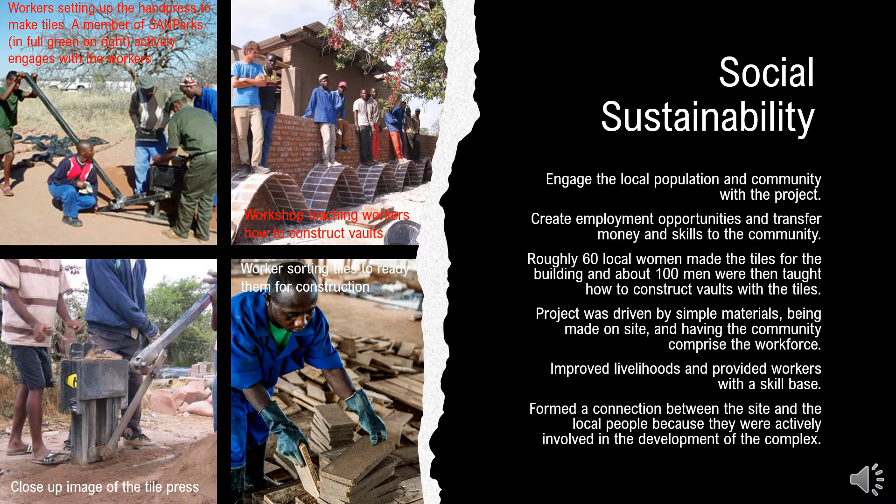The objective given in the competition brief was to provide the national park with an interpretation center that could give the visitor a very clear understanding of the importance of the Mapungubwe region and all the different African kingdoms and cultures that existed there. It was for this reason that the center was built 1 kilometer away from where the original archaeological site was discovered and excavated in the 1930s. In this way, the center celebrates the site of the ancient trading civilization.

The center was constructed with the intention of merging the natural location with the park's cultural heritage by using modern, environmentally sensitive techniques. The idea was to integrate the building with the cultural, natural, and historical landscape of the area.

The goal from the very beginning was not to reference any specific African culture or kingdom with the appearance or design of the complex. The only reference to any African kingdom was to the Mapungubwe kingdom, and this was done mostly by the choice of sites and by the housing of the artifacts rather than any architectural reference. No traditional decorative motifs were used. This was very important because of the many different ethnic groups that claimed traditional ownership of the land, and in order to avoid any controversy by any native group, reference to any local culture was avoided.

It was for this reason, among others, that Peter Rich Architects won the design competition, as their proposal referenced the landscape of hills, rocks, and valleys, rather than any African group. This complex landscape surrounding the project was both the inspiration for the design and the source of most of the materials for its construction, resulting in a composition of structures that are authentically rooted to their location. The whole design and architecture of the building was focused on its integration into the natural landscape of the site.

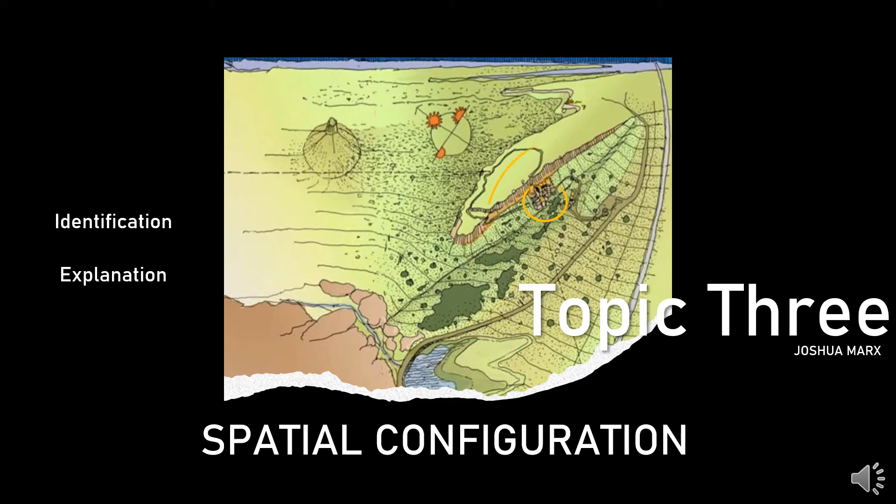Moving on to topic 3, spatial configuration, where we will be identifying and explaining the different types of connections between spaces. Set in a spectacular but remote veld landscape, Mapungubwe Center exemplifies a contemporary African architecture that gives cultural significance in how buildings interrelate and integrate with the environment. The complex rocky landscape was both the inspiration for the design and the source of materials, creating structures that are authentically rooted to their location.

The architecture gives us unusual and imaginative exhibition spaces for disseminating the intricate history of successive civilizations who have occupied this area from the 9th century until the present. But it also raises awareness of the vulnerability of the local ecology and the importance of its preservation. The building shows a naturalistic expression, one that grows from the semi-barren landscape, intense, still, and sublime, giving a connection as an apparent landmark to all lands and hilltops around it, just like the Mapungubwe mountain.

The vast tracts of veld, with rifts of beautiful native trees such as the fever tree and the remarkable baobab, alternate with the valleys, flat-topped hills, jagged horizontal ledges, and groups of rounded, stony hillocks. The synergic experience of the building connects to its land, as if rising from the terrain.

Looking closer into the building, a series of equilateral triangles structures the landscape and the way the building addresses it. The triangles are designed around an axis linking the centre's entrance and the archaeological excavations. This axis traverses the site, running parallel with the hilltop ridge and rivulet below. It is not obviously articulated, but nonetheless provides a subconscious appreciation of the ordered way in which buildings are grouped, and the informal flow of outside spaces and planned landscape elements between them.

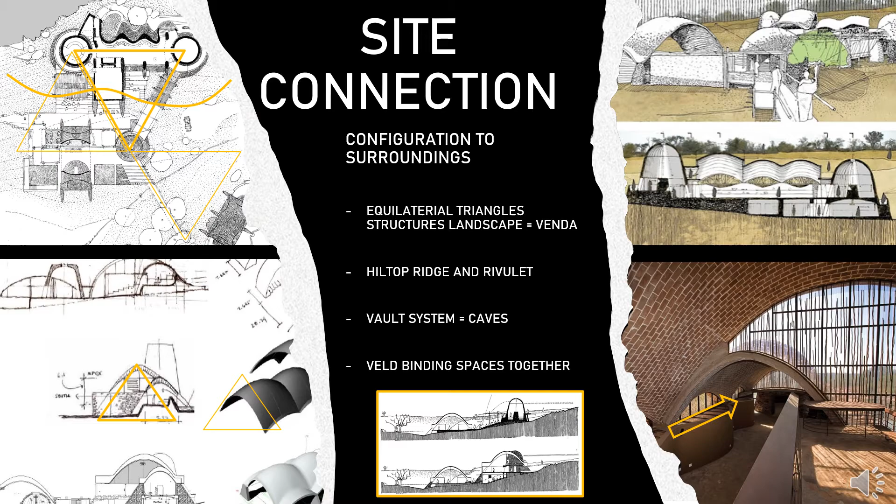These vaults resembled a system of caves, which is culturally significant. Caves were regarded here not only as places of refuge and shelter, but were also used ritually in rainmaking ceremonies. Contrasting to the internal spaces, the shaded areas and covered walkways bind together the landscape spaces between them, which are planted with indigenous species of the surrounding veld, so nature seems to flow through the structures, just like that between mountains.

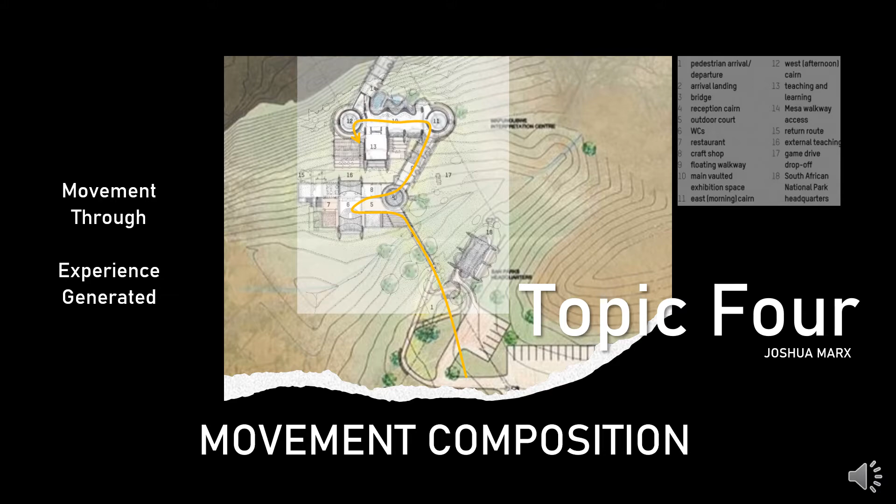And on to topic 4, movement composition, where we'll be explaining the user's movement through the building and what type of experience is generated with this. The arrival. Set at the foot of a mesa, we meet the park entrance. The building is visually contained by 3 hollow cones that evoke rock markers commonly found in South African cultures.

From a distance, the undulating rock-clad vaults blend into the landscape, where on approach, the thin arched edges are exposed and the vaults soar above the ground. The slightly sloping ground helps to make the various pavilions look even more like natural outcrops, billowing out of the earth. The sloping terrain is an integral part of the architectural design, providing a series of viewpoints along the paved routes set between dry stone walls and from the terrace seating carved out of the hillside.

Now at the entrance gate, Mapungubwe Center is approached through a valley from where the outcrop of the new buildings merges naturally into the southern slope of a rocky plateau. From here, there is a view to a hill about 1 km away, where the original archaeological site was discovered and excavated. The clever analysis of the site and the way it is structured to accommodate the program becomes more apparent as you move from the entrance in the valley to the plateau 14 meters above. From here, the whole complex is revealed and linked visually to the archaeological site on the hill beyond.

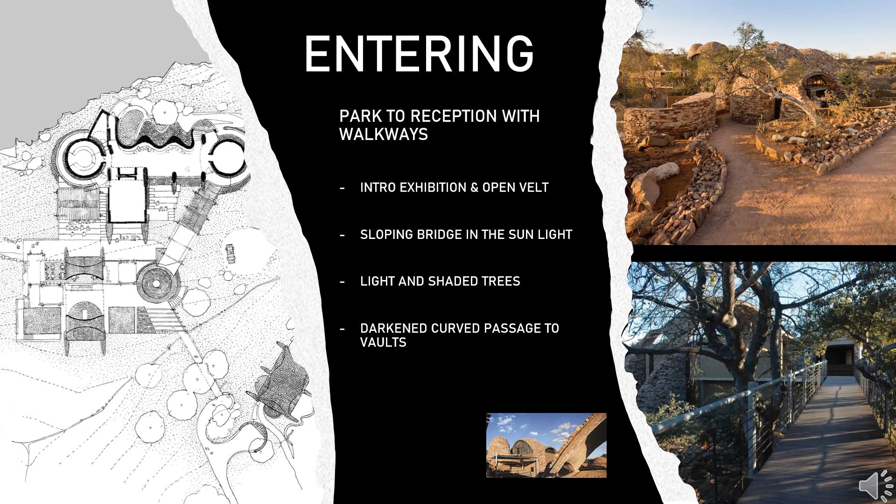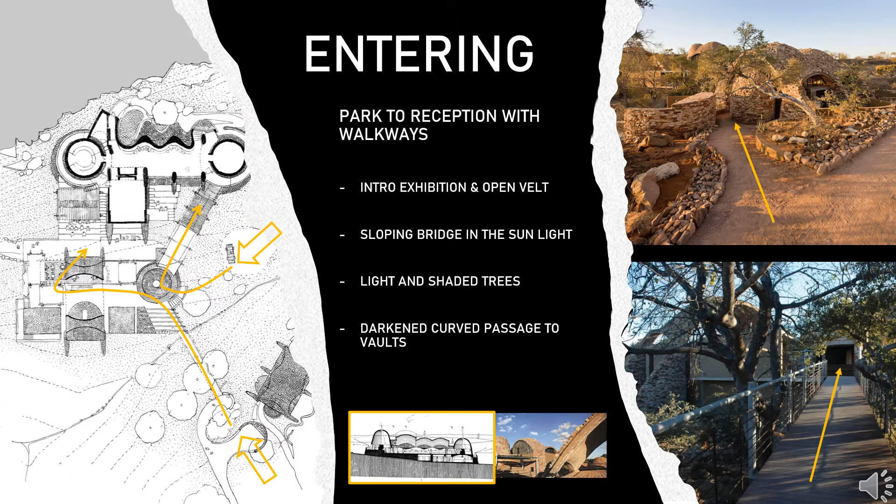Entering. Arriving at the parking area, tactfully obscured by a hillside spur, you move past an outdoor introductory exhibition to cross the open veld to a group of shade-providing trees with views of the south elevation. A sloping bridge brings you to the reception cone, which is punctured by an oculus so the sun's light bathes the interior. A freestanding vault generously spans the space between the ablutions and the restaurant facilities. Here we find the visitor's first view across a seasonal stream, the principal vault springing directly from the land on robust buttresses, setting the volume and tone for the site.

The volumes near the reception are linked by terrace seating, contrasting structured horizontality of the contours with the sheer domes and arches. The surfacing of all the masonry and local rubble stone creates a timeless quality, with nature rising once again to a singular large rockfall. From the reception area, a darkened passage curves around the cairn to an inclined, elevated walkway with a slatted timber floor and mesh-screen balustrade, leading us to the entrance of the historical facility.

The stone walling technique used in the building of the centre was adopted from the native method prevalent in the Mapungubwe area. The light and shade inside gives itself to the shapes and patterns of the world around the building in an African environment, in the closed under shade of fever and remarkable baobab trees, with the alternating open veld valleys, stony ledges, and rounded stone hills. Mapungubwe is a fascinating landscape.

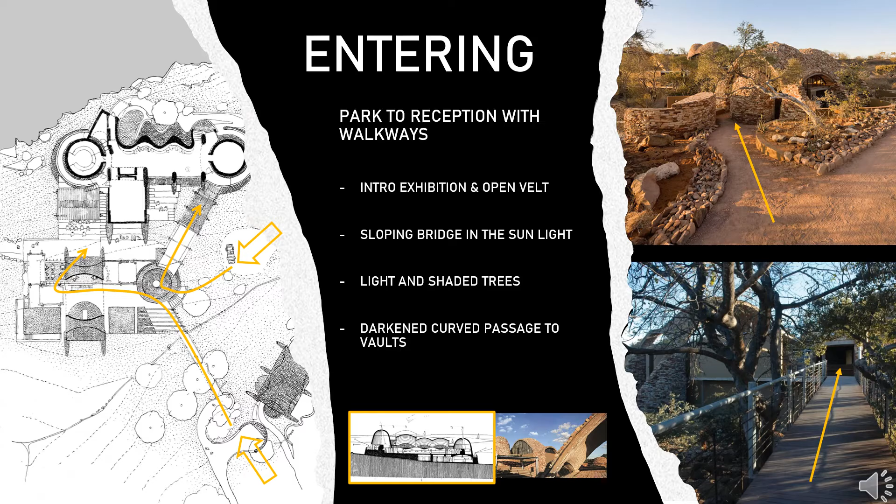Shaded by tall trees on either side, you reach a heavy, stone-clad, sloping buttress marking the threshold to the crypt-like exhibition areas. In these spaces, vaulted tiled soffits exhibit the faces of people who have been part of the historic continuum of Mapungubwe. The main vaults. Passing through a sequence of different spaces, vaguely aware of the triangular ordering system, as you ascend through the building, you finally arrive at the generous vaulted exhibition area at the building's summit.

Shaped by natural structural forces, large vaulted spans can be achieved with minimal roof thickness, achieved through local materials and simplicity of construction, allowing unskilled labor, which was a common trait. Timbrel vaults are ancient structures originating in the Mediterranean region 700 years ago and are still in use today by the Catalans. Large areas cut out of the vault admit a soft, almost sacred half-light to the exhibition area. The experience of the internal exhibition space is cavernous, articulated by the exposed tiles made from the local soil.

The external terraces are shaded by horizontal slats to create areas reminiscent of the traditional African gathering space, or kgotla. Curving in two directions, the lofty, undulating vault bears lightly on the side walls. Colored light falls through the glass panels on the south wall, and the famous golden rhino, one of Mapungubwe's most precious treasures, shines in its own impressive display cabinet.

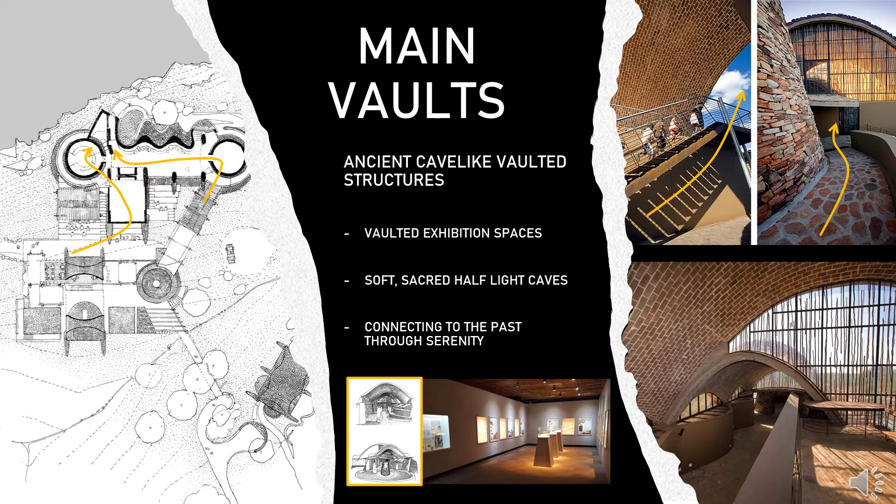The final movements. As visitors move from the main vaults, they have a choice of ramp and stair, internal and external, to move into the upper parts of the vaults and appreciate the privileged view of the lower volume, as did the ancestors from the elevated position on the plateau of the hill. The route continues outside the covered spaces, leading to the highest part of the site and affording a view across a flat expanse to Mapungubwe Hill in the distance, with its backdrop of Limpopo.

As you experience a sequence of delicate walkways with changing directions and ramped routes throughout the entirety of the building, the orientation and variety of structures from lightly covered walkways to vaulted spaces, all punctuated by open courtyards, landscaped with rocks, plants, and pools, you can only marvel at the ingenious organization of a complex and historically potent site.

All this comes underpinned by a strong social dimension, ending with a gradual climb to the mesa, to the highest point of the site, providing the visitor with a multiplicity of experience and views, evoking the complex social interactions of the many cultures that have traversed the land.

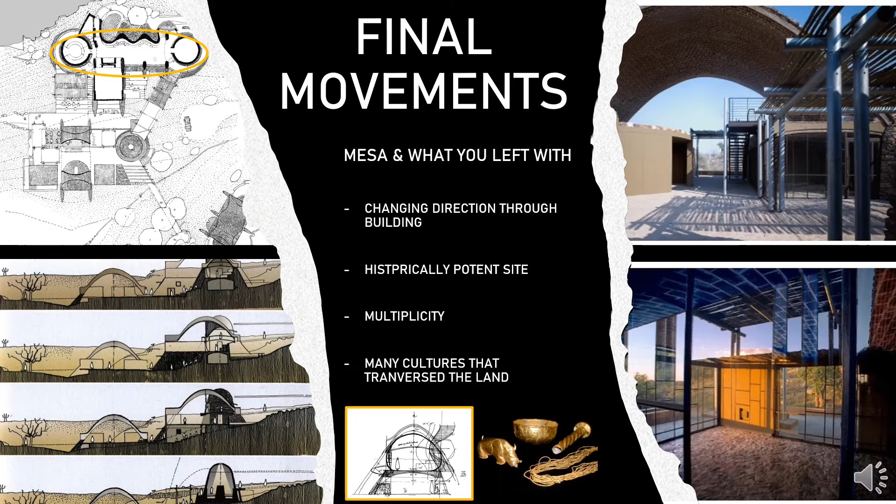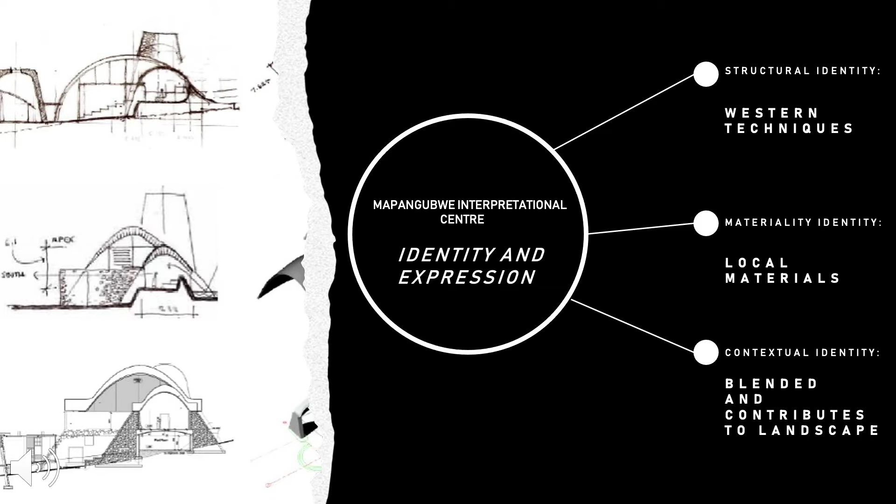Identity can be described as many things, as each person's view on identity will differ. Architectural identity is somewhat similar; however, we can gather a shared understanding of this identity through different aspects of each specific building. In analyzing this building, I found it easier to explain identity through the three most crucial aspects of this building, these being structural identity, material identity, and contextual identity.

Starting off with structural identity. The structural technique used is timbrel vaulting, which is commonly used outside of South Africa, in North America and Europe. Timbrel vaults are often found in sacred buildings, such as churches and public buildings. So when one is to describe the structural identity of the Mapungubwe Interpretation Center, it is very clear that it is of a Western nature.

Secondly, the material identity. The material identity begins to highlight the use of African building techniques, which is the making of earth bricks. When thinking back on identity, these bricks, all uniquely made by local masons, give the building a strong sense of African identity, as the bricks are made from the very earth that acts as the base foundation of the building.

Thirdly, the contextual identity of the building. Contextual identity starts to bring in this notion of coexistence. The coexistence of the building and landscape working together, as one is not trying to overpower the other, and the building is merely an extension of the landscape.

With reference to Jonathan Noble's book African Identity in Post-Apartheid Public Architecture: White Skin, Black Masks, he describes identity and expression through four principles, which include imaginative dialogues, symbolic inversions, hybrid authenticities, and double symbols. Through the analysis of these three aspects, imaginative dialogue starts to expose itself, as its definition is the recognition of multiple cultures, their differences, and histories.

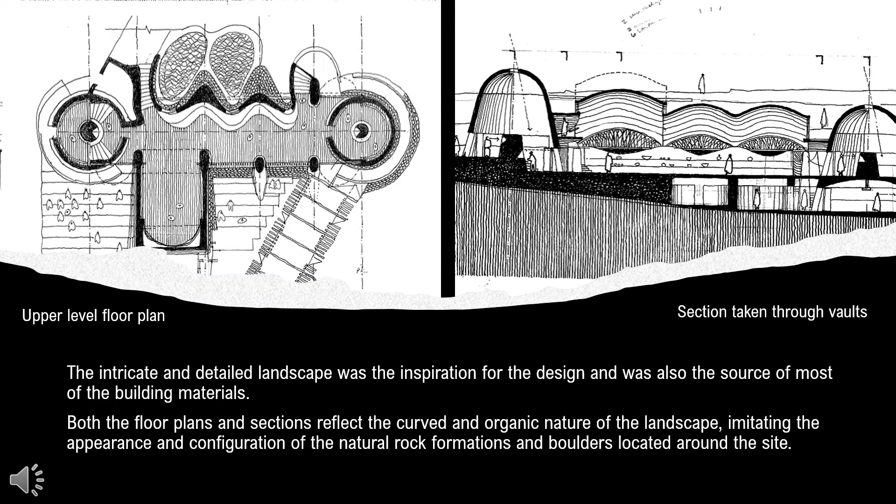Both floor plans and sections reflect the natural landscape, and this can be seen in the curving and organic shapes meant to imitate the curved nature of the boulders and rock formations around the site. The poverty relief program for the building project was such an important issue that SANParks wished to address, that Peter Rich Architects created a design that would center the building elements solely around people, meaning that most of the materials used in the complex were gathered and created by the local people.

The building is constructed of locally made pressed soil cement tiles, which are then used to form the three thin-shelled structural tile vaults of the roof. These tiled vaults are shells that act in pure compression that are unreinforced by any kind of steel. Simple timber formwork was placed just as a guide for the workers when placing the tiles.

The 700-year-old Mediterranean vaulting tradition used to construct the vaults allows the complex shapes to be built by newly trained workers without extensive formwork. Over 200,000 pressed soil cement tiles were made for the project and form the main material that was used throughout the entire complex.

The tile vaults rely on fast-setting gypsum mortar and thin tiles laid on edge. This Mediterranean type of vaulting is called Catalan or Guastavino vaulting, and commonly known as timbrel vaulting in South Africa. By adapting elements of Mediterranean architecture in a structural and symbolic way, it can respect the African climate and perform correctly under the harsh conditions.

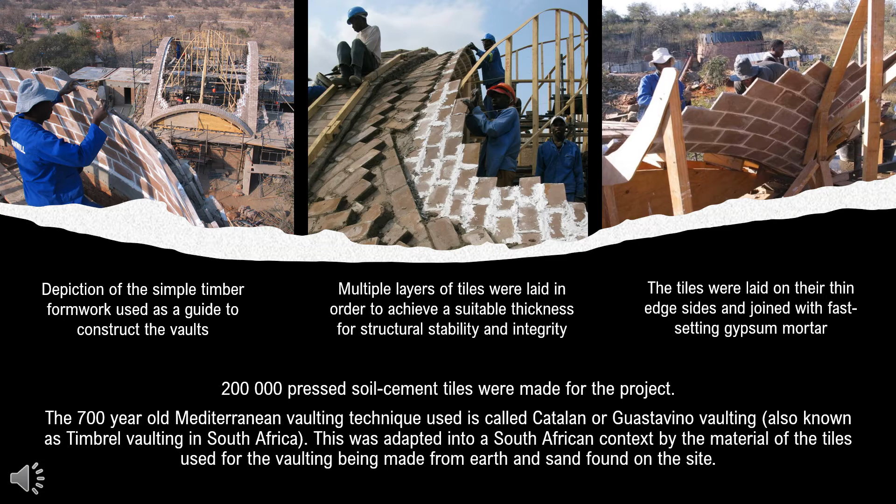Over 60 women were trained to make the earth tiles, and over 100 men trained to construct the vaults of the center. It is important also to note that the tile making process proceeded for an entire year before any other work on site began. The tiles are made of local earth and sand mixed with 5% cement and pressed using a modified Hydraform block press. The modification allows thin tile production from a standard press on reusable plywood blanks.

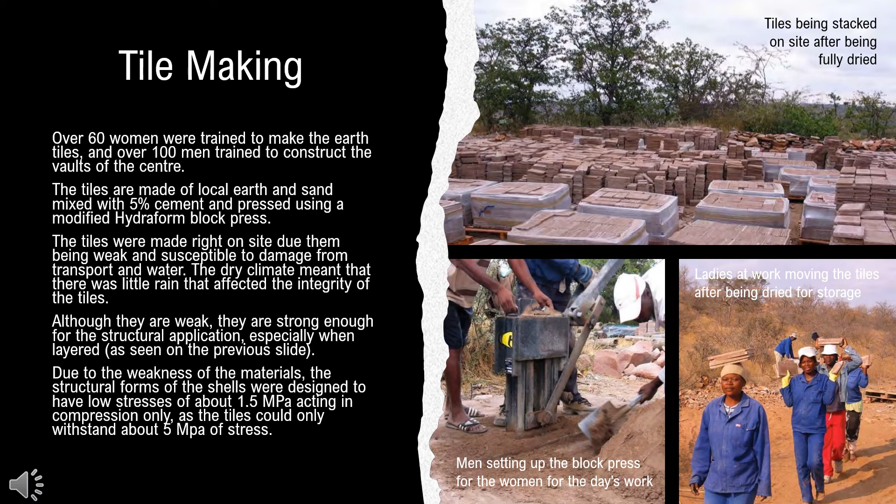The tiles are weak but strong enough for the structural application. They must be handled carefully and are susceptible to damage from transport and water. Although the tiles have some disadvantages, for the Interpretation Center project they were the most appropriate solution to building in the local context. The structural forms of the shells were designed to have low stresses of about 1.5 MPa, acting in compression only, because the soil cement tiles can only withstand about 5 MPa. As one can see, the design of the complex was very much centered around the structural properties and capabilities of the materials used.

Reeds were used to cover the semi-open spaces throughout the complex and provide the necessary shade in the hot climate of Mapungubwe. Except for the cement added to the earth to give the tiles strength and used in the mortar beds between the layers of tiles, all materials, including earth, sand, gravel, and stones, came from within a few kilometers of the building site. By reducing and eliminating steel in the vault construction, a longer lifespan can be achieved without the concern over deterioration due to corrosion.

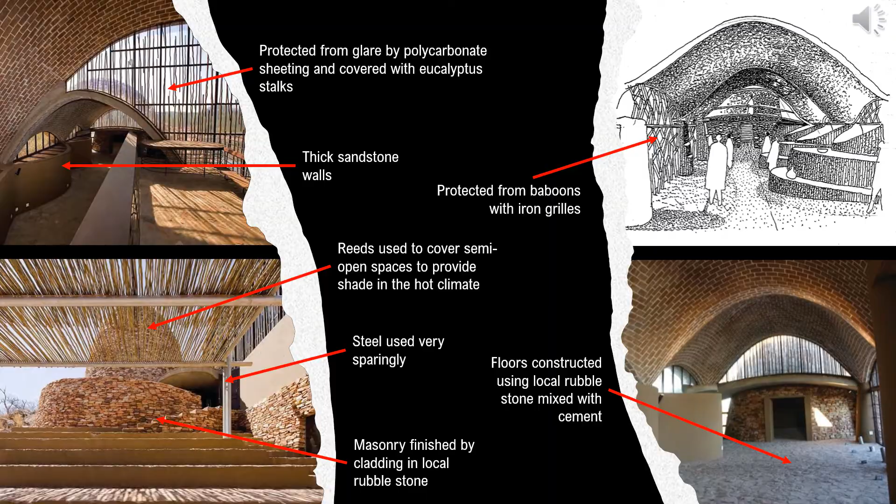It is clearly evident that the materials of the complex and the construction methods used have contributed to the design being fully rooted in the genius loci of the natural location, as well as being perceived as a place that is deeply connected to the histories of the past kingdom that it is celebrating. Although it may not make any direct architectural reference to the culture, it has a remarkable way of not needing to, because of how well it does reference the Mapungubwe kingdom in its materials and construction.

According to the architect Peter Rich, the centre symbolizes Africa before colonialism, its ancient cultures and mythologies. The intent of the architect was to create a space that is sacred with a fascinating mystic approach to the layering of richness and true intent. A storybook type of space, evoking the imagination of occupants, wanting them to be within the journey of space in time. The building serves as a clear symbolic quality and concept of its context, an eccentric African space with admirable connectivity in becoming one with its natural surroundings and history.

In an interview, Rich claims that during the construction of the building, not all the bricks in the vaulted roof structure lined up correctly, and then bricks had to be cut to close the dome-like roof, resulting in an irregular junction, adding a richness and a meaningful delight in the storytelling intent of the space.

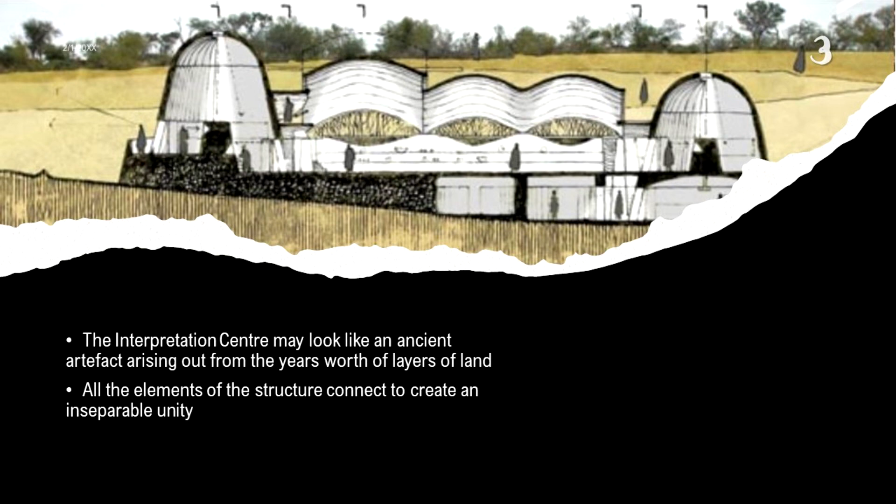From another point of view, the interpretation center may look like an ancient artifact arising out from years' worth of layers of land. The domes connect the different structures so that they look like a range of prehistoric caves in the landscape. All the elements of the building, namely the integration of the building and the landscape, the subtle and not so subtle presence of references to the cultural heritage of the area, and finally, how it ties to the historical site and artifacts all connect to create an inseparable unity.

In conclusion, the Mapungubwe Interpretation Center is authentically rooted to its location, focusing on the figurative symbolism of the mysterious storytelling landscape and architecture, placing great attention for the building to be one with nature rather than standing out for the purpose of aesthetic. The architects placed tremendous focus merging the archaeology, ecology, simplicity, history, storytelling, and mode of making in the design. A rather naturalist way of making, using natural elements rather than a modernist approach. A building invisible in nature. It clearly enhances the unique African space, architecture, and experience.